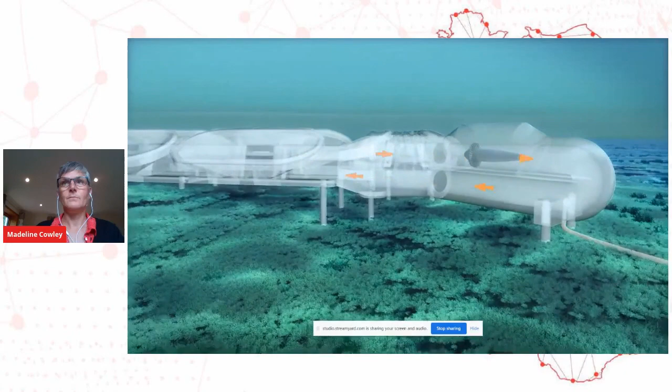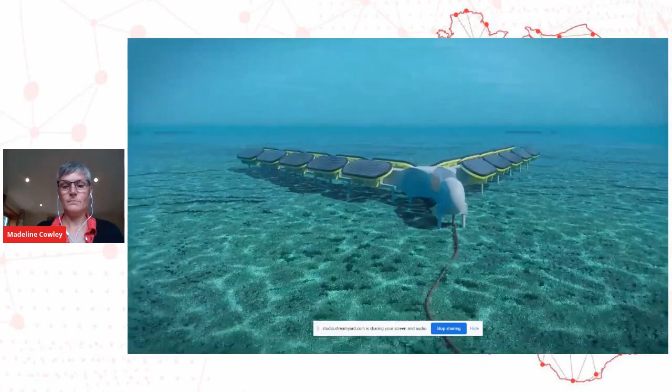Out to sea, safely beneath the ocean's waves, sits mWave. Bombora's pioneering patented technology harnesses the abundant power of the oceans to generate megawatts of clean, renewable energy. A series of air-inflated flexible rubber cells, each 15 metres in length, are mounted to a concrete foundation structure arranged to optimise energy capture. As waves pass overhead, the underwater pressure increases. mWave's rubber membranes are compressed sequentially, forcing air inside the cells into a central duct. Valves deliver a one-way airflow to the turbine, directly spinning a generator, converting this rotation into electricity. After passing through the turbine, the air is recycled to reinflate each membrane in a continuous sequence. The sustainable power generated by mWave is transferred to the electrical grid via a sub-sea cable. mWave's simple and modular design, with removable component parts, makes it efficient to operate and maintain. Its modularity makes it rapidly scalable and adaptable to both nearshore and offshore environments. Bombora, powering the blue economy with waves.

So this is the prototype that we will be installing. Just to show you some of the features of it, we have four cell modules on a steel construction. The cell modules are fitted with membranes at the top. The device sits on the seabed and is ballasted to the seabed, whilst being keyed into the seabed through its foundation. We have two main ducts going through the central spine of the device, which directs the air towards the power takeoff unit, which houses a turbine and a generator.

And then we have an umbilical from the device, which feeds the device air and communications and auxiliary power. In this demonstration project, we don't have a grid connection and therefore are not feeding power into the grid.

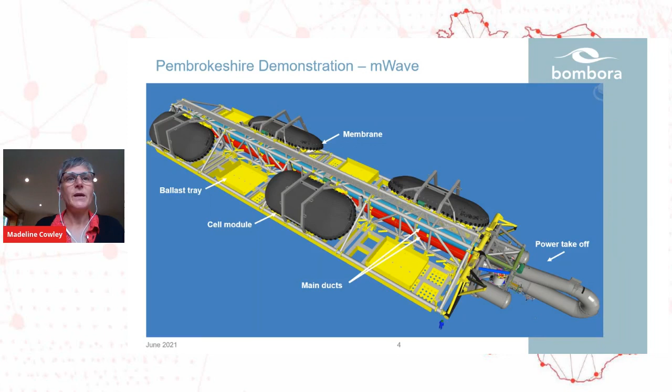So as I said, we have four cell modules that are in the final assembly phase. This is before assembly was started in this photo. These are very large structures. They're approximately 15 meters by 5 meters, and they're 70 tons fully assembled. The mWave device itself is 75 meters by 20 meters, so around about the size of a football pitch itself.

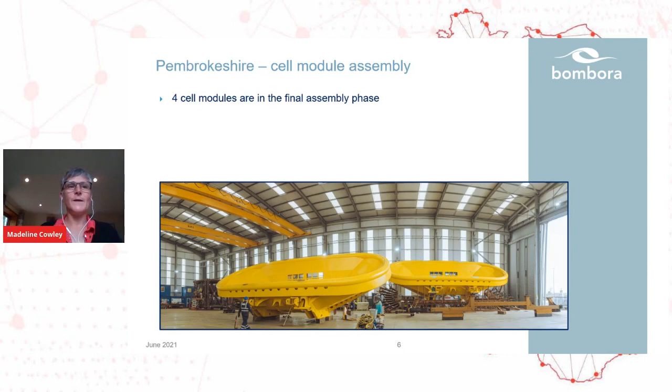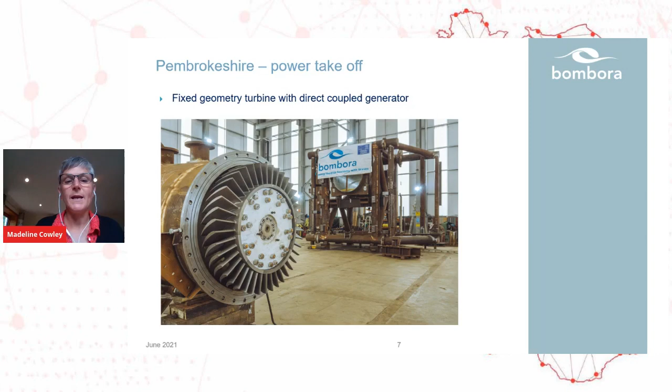Photo of the power takeoff. We have a fixed geometry turbine with a direct coupled generator. And Mainstay have been assembling the PTO, the power takeoff unit. The turbine and generator are assembled at the moment, and PTO is almost complete.

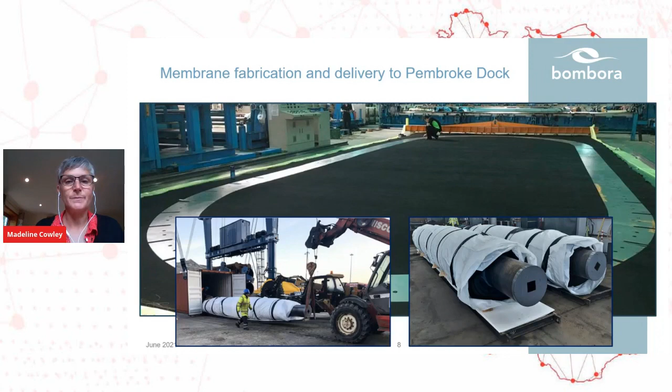This slide shows in the central picture, we have the membrane, which is attached to the cell module. This is after it had been fabricated. They're being supplied by HYC in Taiwan. We couldn't get membranes large enough in the UK. And then in the bottom pictures, you can see the delivery of the membranes to Pembroke Dock in rolls after being shipped over.

So the schedule to completion, as I said, we're due to deploy this year, and we will be testing the device for an initial period of 6 months. We are deploying the mWave in 15 meters of water. We then have a 1.4 kilometer cable from the mWave out at sea to the control station at East Pickard Bay. The cable feeds air, comms and auxiliary power.

So in terms of the regional economic benefits, there's been an inward investment of £20 million to the region, and 90% of the contracts have been awarded. We have more than 80% of supply chain sourced from UK companies, and with over 50% Welsh content, 33% to Pembrokeshire-based companies. Pembroke Dock has very good skills in terms of steel fabrication, and we've managed to take very good advantage of this, awarding large contracts with Mainstay Marine and Altrad.

Bombora itself has grown rapidly since arriving in Wales, originally from Australia, from 4 staff to 27 staff. So offering highly skilled opportunities in the region to our staff. And half of the staff have been recruited locally, with others coming from England, Canada and Australia. And we have calculated that 45 jobs have been sustained through the supply chain contracts in Wales.

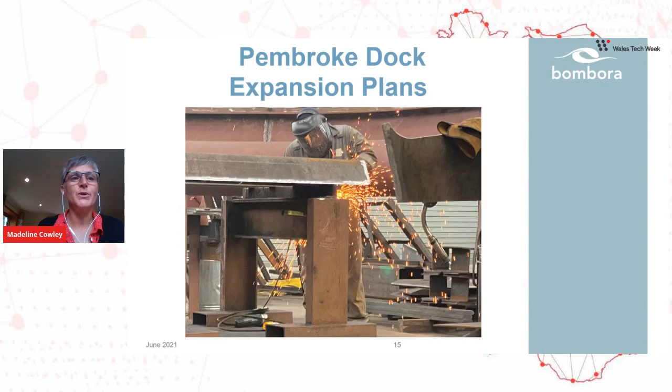As a company, we also have expansion plans for Pembroke Dock. Pembroke Dock's well located to service offshore projects, such as European projects, Norway, Spain, Portugal, etc. And we have a planned phased expansion of assembly and export centre facilities in Pembroke Dock to service the growing pipeline. So we would be establishing an assembly and export centre within Pembroke Dock to service these future projects. And at Pembroke Dock, we would manufacture the membranes, do the module assembly and undertake system testing.

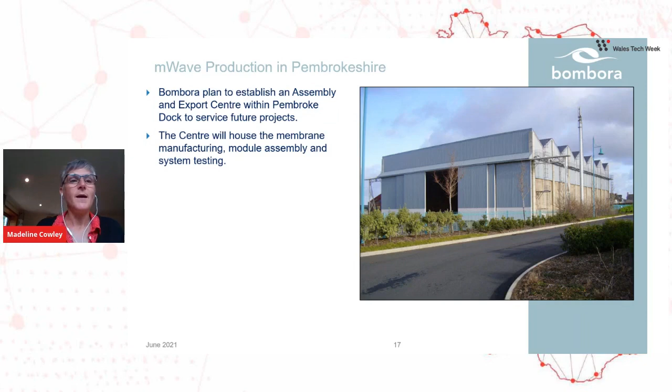And that's a quick run through of the project and Bombora and the company's plans. Thank you very much.

I think you're on mute, Manon. Thanks, Madeline. Thank you for that.

And thanks for a brilliant presentation. Really exciting to see all the progress happening down in Pembroke Dock, and also just the scale of the project. We're really excited to see the deployment later this year.

So I think we'll go next to Martin Edlund from Minesto for your presentation. Thanks, Martin.

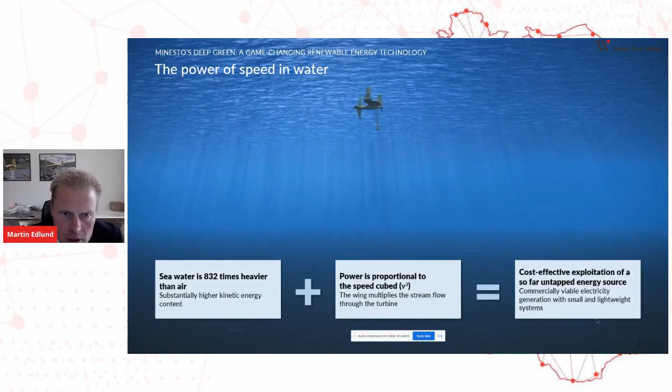I'll try to give you just a brief insight into what the technology is about. We use an advanced control system on this tethered kite attached to the seabed. And this principle in itself is not just a cool technology and an engineering challenge. The inherent properties and behavior of this system is what drives competitiveness.

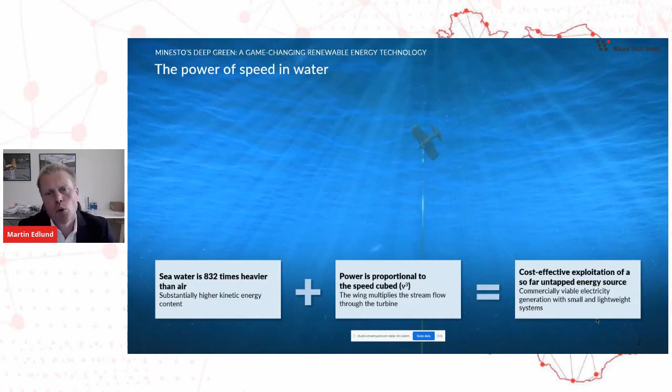The tidal currents that rush through the Irish Sea and brush the coast of Wales are by nature not that high in intensity compared to hotspots around the world. And this principle we're using is a perfect match for the Welsh resource, which means that when we do the numbers roughly, we may even talk about gigawatt potential of generation that can be served from North Wales, which is fantastic, I'd say.

And it's about how we sweep a large cross section of the sea and use an extremely lightweight system. We talk about tens of tons per megawatt for this device that we're using. And what we do in Wales, I mean, we're located on the Swedish west coast as well, but in Wales we have the core of operations and operations development.

We also lease from Crown Estate the first commercial scale site for tidal generation. So we have an agreement for lease at 10 megawatts and a potential lease area that will be able to deliver up to 80 megawatts. We have worked at this site over the years now and developed one of the world's most capable operations teams.

We've also established and commissioned, I'll show you some pictures later, an assembly and service hall in the port of Holyhead, in the Stena area there, which is a key asset for further commercial development, both to build, service and develop new systems, but of course also to service the actual power generation projects and sites directly off the coast here.

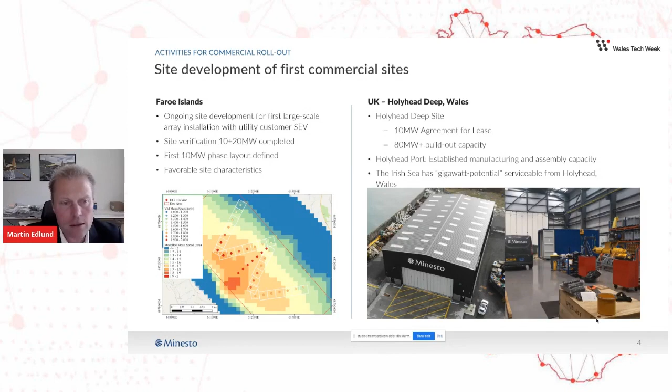We serve two markets. I talked about the utility scale device for next year, which will be really important to get that 1 megawatt device ready. We can talk about units up to 3 megawatts and perhaps 20 meters wingspan. And then also a microgrid market to serve remote locations and islands, which is important for quick commercialization of what we're doing.

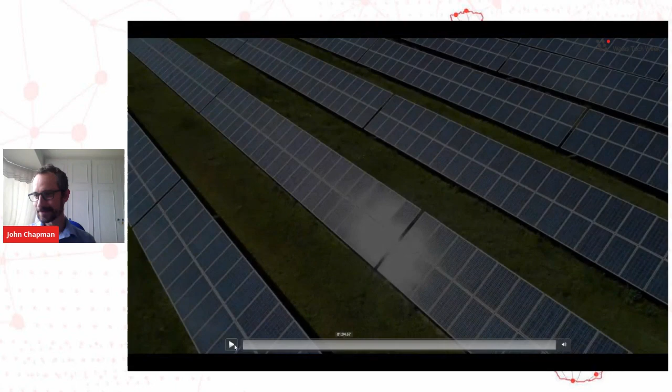The world is transitioning to renewable energy. But the oceans, the most abundant source of renewable energy on our planet, remain almost completely untapped. There's a vast amount of power available, enough to power the entire world. The only question is how to harness it. WaveSub, DualSub, and WindSub are pioneering new technologies from Marine Power Systems that will allow the vast resource of ocean waves and winds to be efficiently exploited.

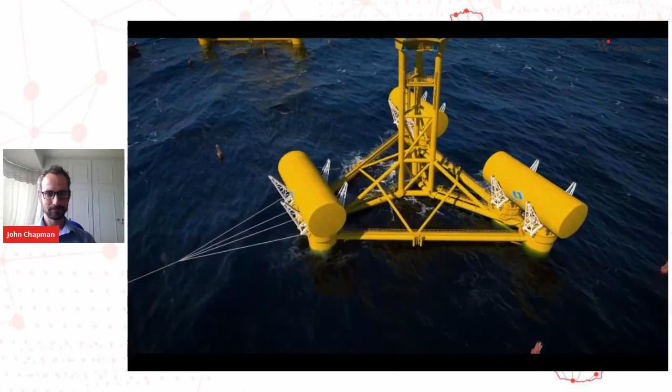WaveSub exclusively harnesses the power of the waves. WindSub enables the secure anchoring of wind turbines in deep water. And DualSub combines the capture of both wave and wind energy in a single device. All machines share a common submersible platform that allows them to be transported across the sea and installed without the need for specialist vessels. Once installed, these unique devices will deploy automatically using data on wind and wave conditions to determine the positioning for optimum energy capture.

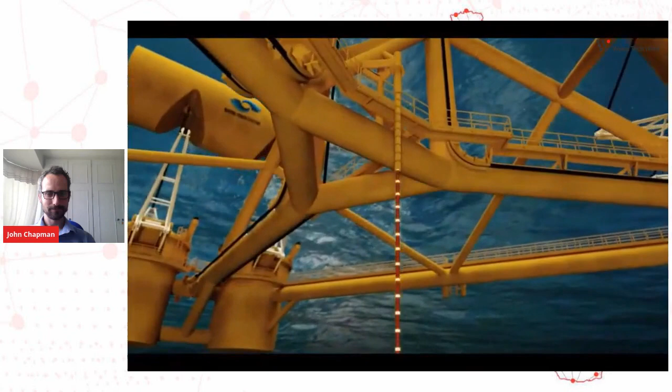The power generated is sent to the local grid network via an undersea cable. The machines are straightforward to maintain. They can be returned to the surface and accessed for maintenance, or disconnected and transported to shore for major servicing. WaveSub, DualSub, and WindSub are highly compatible. They can be installed together in farms that maximize the use of the resources available. WaveSubs and DualSubs will be installed in lines that face the waves, whilst WindSubs will be spaced further apart for optimal wind energy capture.

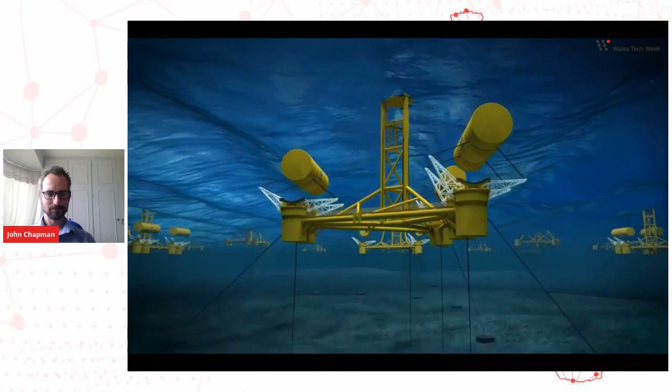This type of farm layout achieves the best possible use of marine resources, keeping ocean energy farms as compact and productive as possible, whilst producing lower cost power that's more consistent due to the dual energy sources of wind and waves. Each device has a capacity of several megawatts, with farms having a capacity of hundreds of megawatts, enough to power hundreds of thousands of homes. The ocean's waves and winds could provide 20% of global electricity by 2050. Marine Power Systems, unlocking the power of the oceans.

Okay, so as the video said there, our vision is to unlock the power of the oceans, and that will be by using wind power and wave power. We have 3 devices to capture the power. We have WaveSub, which is a wave-only platform system. We have WindSub, which is an offshore floating wind platform, and DualSub, which combines the 2 into a single platform. To achieve all of these 3 devices, we have 2 proprietary technologies in-house. So we have the platform system itself, and we have the wave energy conversion system.

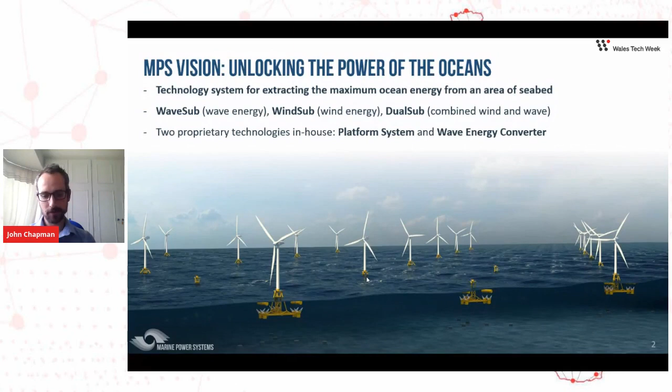So the advantages of our platform system: from the outset, we knew it had to be manufacturable. And so we've got a concept that can be assembled in most coastal locations with prefabrication made in a specialist site. We make sure that the devices are highly transportable, so we know we need to get them to the right locations easily and relatively quickly. And deployment likewise has to be smooth, easy. You need to do it within a weather window that's quite often quite short, so it has to be well understood and efficient. The device has to be stable. That's throughout its life, whether it's through the towing out of the system or during operation. The stability as well as safety and access ensures good power generation.

The system also needs to be maintainable. We achieve this by having the above surface access points. For example, if a small fuse fails in the system, we don't have to bring the whole device up out of the water. We can send someone out to fix it on site. And the system also has to be survivable. Storm waves in the ocean are orders of magnitude higher loads than the energy waves that we're targeting. And so you have to either be able to withstand that load, which usually ends up in excessive cost, or you need to have smart ways of getting out of that wave. And that's what we do.

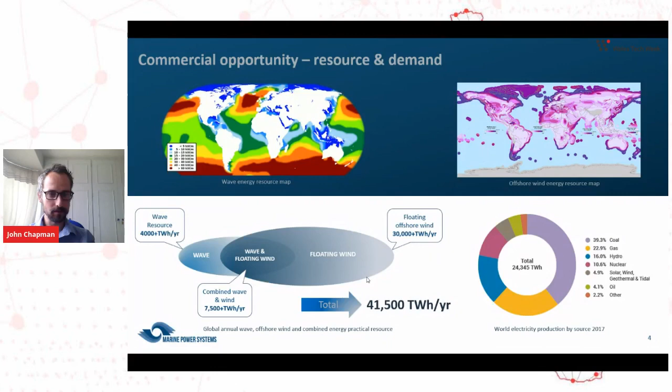So onto the platform system itself. The performance of this, we've had an independent study looking into all of the different types of floating platform that people are looking at for wind energy, but also for wave. And that survey came back that our structure has the potential to be the lowest structure mass, which equates to cost of the system. It also has a very good stability, which leads to generation and accessibility benefits.

And it has a small mooring footprint, which saves for installation complexity, but also involves a lower environmental impact. So you can imagine some of these systems have long lengths of chain dragging along the seabed, and that scour on the seabed is quite an ecological impact that we avoid with our system.

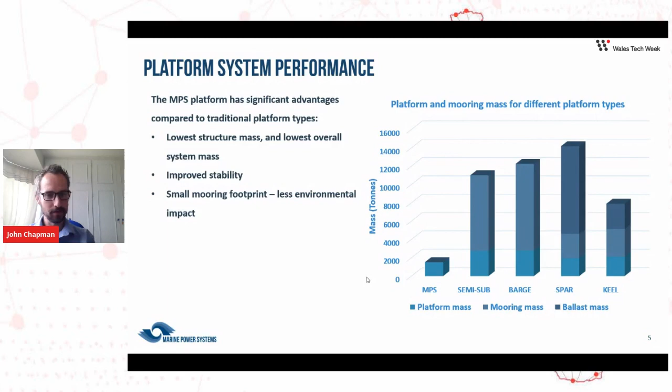We also know we need to be tunable to commonly occurring sea states. So the top rated power is not necessarily what matters, it's how consistent that power is. And so you need to get a good power supply throughout the commonly occurring waves of the system. And to do that, we ensure that tunability, and that gives us the high annual yields that we need.

And then, as mentioned earlier, when those storms come, you either need to withstand them or get out of their way. And we have a system to avoid that storm loading. We dock the absorbers down onto the system, and in that way they duck out of the worst loading of those storm waves.

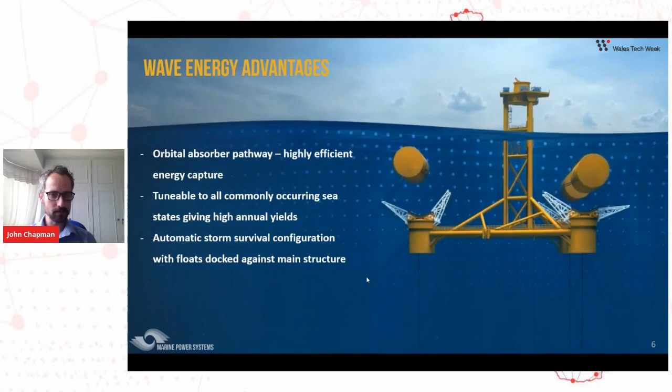A little more then on the wave energy performance. So we have a power takeoff system that's able to control the force interaction with those floats and optimize the performance of the system. In small waves, we can increase our power capture, and in large waves where there's excessive energy available, we can detune ourselves but carry on operating until we get to very large storm waves, in which case we can shut down and avoid those loads.

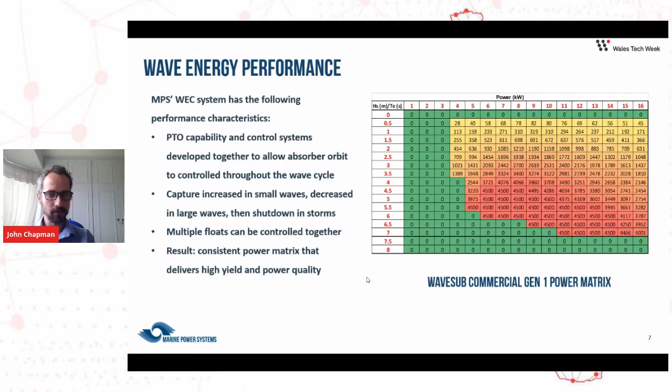You can see from the chart there, this is a power matrix, so we get those high headline figures of the maximum power. But what's also important is that we get a smooth spread of the power generation that can contribute throughout most of the year and give a high energy capacity, not just power capacity.

So what have we done already? We've had a device out in Cornwall where our testing is completed on this now of our medium scale sea testing. Within that test, we were able to demonstrate the transportability of our device, towing from our manufacturing site in Milford Haven down to Cornwall. And then we've demonstrated maintenance of the system at sea, and also the important one there that we've proven we can generate grid compliant power.

And what's next for us? Well, we're currently working on the full scale demonstration device. So this will be approximately 0.5 megawatt single absorber to demonstrate the wave energy system, and an approximately 2 megawatt wind turbine. We'll be starting manufacture late this year or early next, and the testing will happen towards the end of 2022 or early 2023.